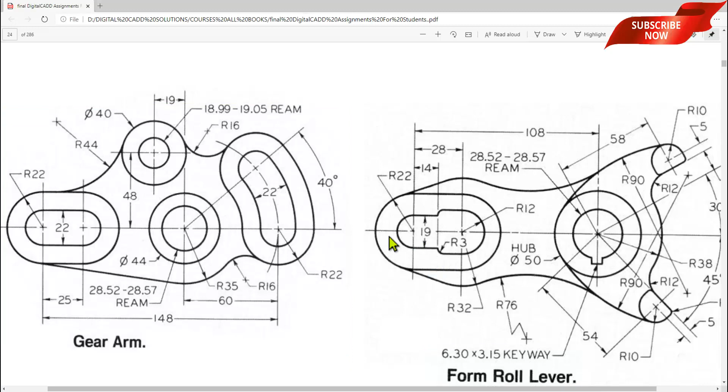In this session, we are going to create two drawings: gear arm and form roll lever. Here you can see we have two drawings for this session. I hope this will help you so much for making some mechanical drawings in AutoCAD 2020.

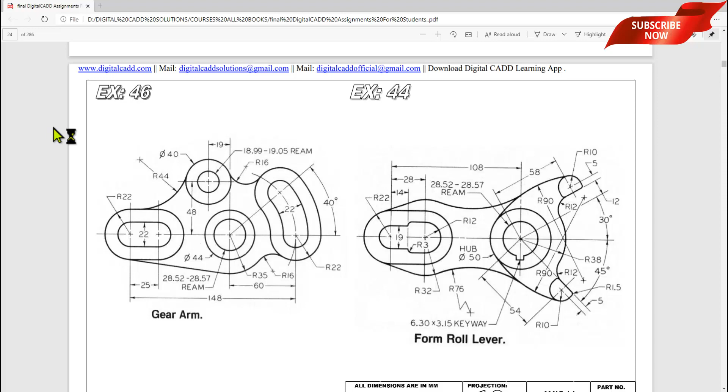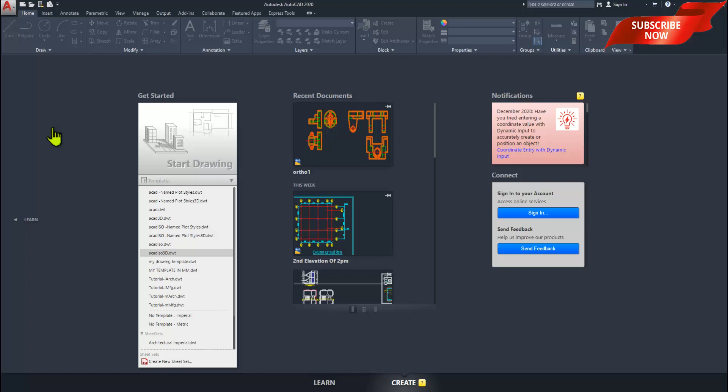Let's begin. We have opened AutoCAD 2020 here. First of all, we need to select a drawing template. I always recommend using this ISO template, ACAD ISO.dwt, so that we don't have to set units again and again.

Our unit is already set to millimeters. You can check by pressing U and enter. Here you can see millimeters is already selected. You can set your precision as well, keep it decimal, and say OK to it.

Here you can see we don't have any file tab open, so let's show it. Just go to View, File Tab, and show the menu bar here. You can see the show menu bar option. Now we have the menu bar also, and let's keep it as it is.

First of all, make grid mode off, we don't need that grid here. And make ortho mode on, so that we can draw a straight line or copy any object in a straight way, either horizontal or vertical. We must make these four buttons on before starting our drawings.

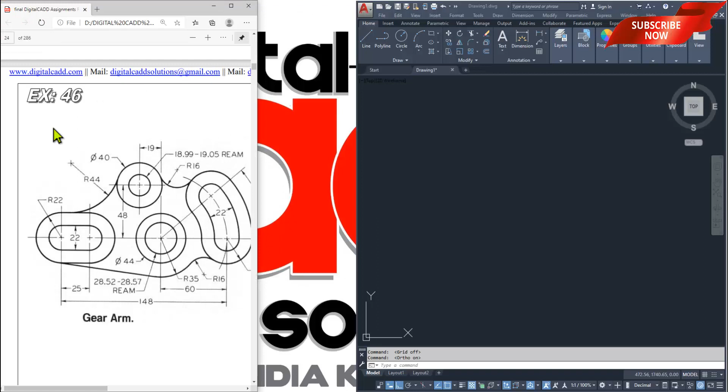Now we are going to split our screen, so that we can see both in one screen: the drawing as well as our CAD software. I hope this lecture will help you a lot. After watching this, you would be able to draw this type of drawing.

Let's begin. First of all, let's create some layers. Here you can see we have the Layer Properties options. Just click here to create a new layer. Here you can see we have a new layer option - one, that is drawings.

Enter. Select the color, let's say yellow, and then OK. The line type is already selected to continuous, and for line thickness, let's keep it 0.30 mm and say OK to it.

Now, center line. Enter. Select the color, that is red. Go to line type - we don't have any center line here, so go to Load, select any one, and press C for center. Here you can see center 2, that is half of center 1, 0.5x. Select center 2, OK, and line weight, that is by default.

Now the third one is dimension, which is very much important. Without dimensions, it's not good to make any mechanical drawing. So just create one layer for that. Select this color, that is cyan, and keep the line type continuous, and line weight default.

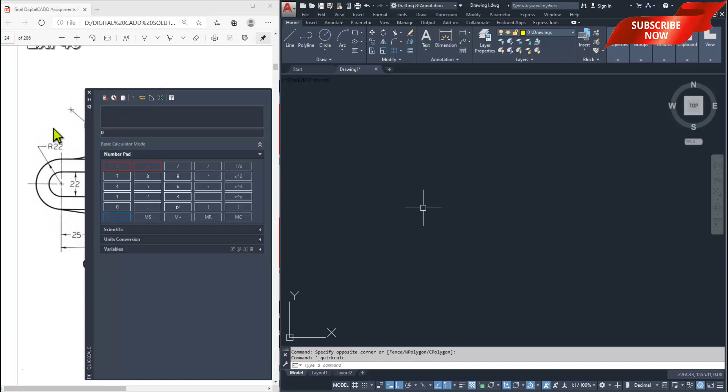Then we will put the value of this circle, that is the ream. Press Ctrl+8 to open the calculator. Add them: 28.52 plus 28.57, equal, and divided by 2 - that is our value, which is 28.545. Select C for circle; C is the shortcut for circle.

Specify the center point. Here you can see we need to have a diameter. Click the diameter option and type the value, that is 28.545. Here you can see we have applied some thickness to this layer, but we can't see it.

So we must make this button on to see the thickness we have applied in the layer. If you want to check the diameter as well as radius, go to Utility, and here you can see radius or diameter - you can check from here, 28.55.

We have entered the value 545, which is quite good. Now we have 44. Again press C for circle, specify the center point - here we can see diameter, and that is 44, the diameter.

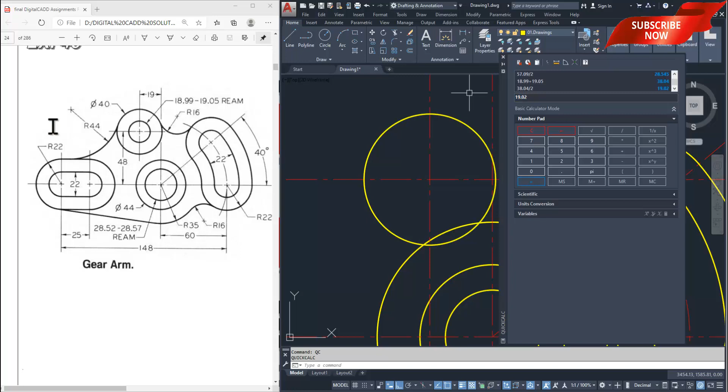One more: 18.99 plus 19.05 divided by 2. We can calculate. Control, otherwise press QC for calculator. Q is the shortcut, QC is the shortcut for calculator. Quick calculator. And here we have the value, which is 18.99 plus 19.05 equal, okay, divided by 2. That is our exact value of diameter, 19.02.

Then, from here select this, start from here, 19.02, okay, that's okay. So this is also done, and now we must create this profile.

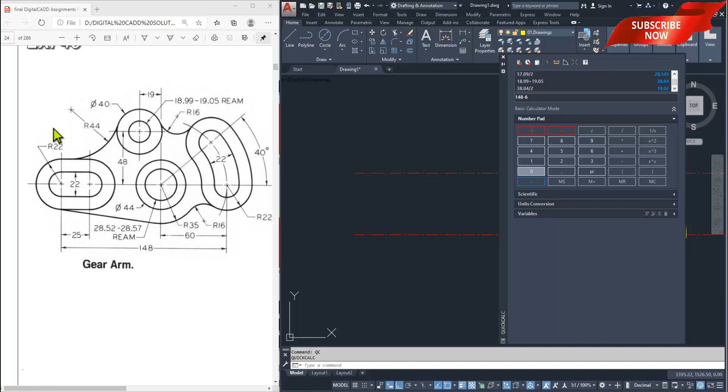So then we have to make an offset of 148 from this center, otherwise minus 60 from here. So you can calculate here 148 minus 60. QC is the calculator, and 148 minus 60, so you can see 88. Now O is the shortcut for offset. 88 is our offset distance from this center, then like this.

Now we have to create this circle. C is the circle shortcut, and radius is given 22. Type here 22. Again diameter is given 22, again D for diameter 22, which is good.

Then select these both circles, go to copy command, specify any base point, click anywhere and type the distance, which is 25. So just type here 25, space.

Now L is the shortcut for line, quadrant to quadrant. You can't see the quadrant because in our object snap option, not all the buttons are on. So we must select object snap setting here, select all options, then okay, so that we can see all the nodes. Here you can see quadrant to quadrant. This is very much helpful.

Remember one thing, before starting any drawing we must ensure that these 4 buttons are on or off. Make sure all 4 buttons must be on. In object snap here you can see all nodes must be on, so that we can make all the drawings easily without any error.

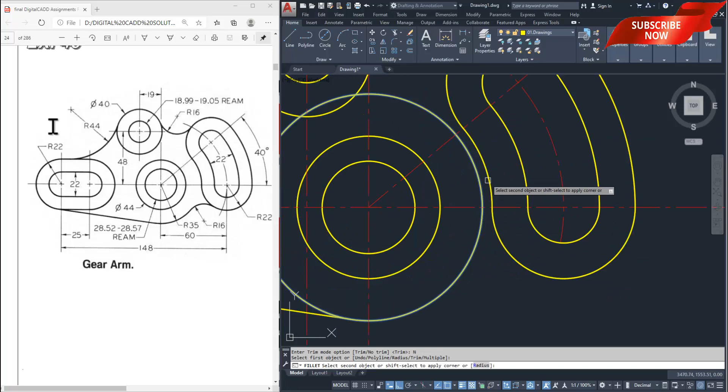Here is the fillet tool, select this tool. Here is the radius, type the value, that is 16. Now go to trim and you have to select no trim option because we don't want to trim. The radius is given 16, select this circle as well as this circle, which is joined actually, that's why we can't apply fillet here.

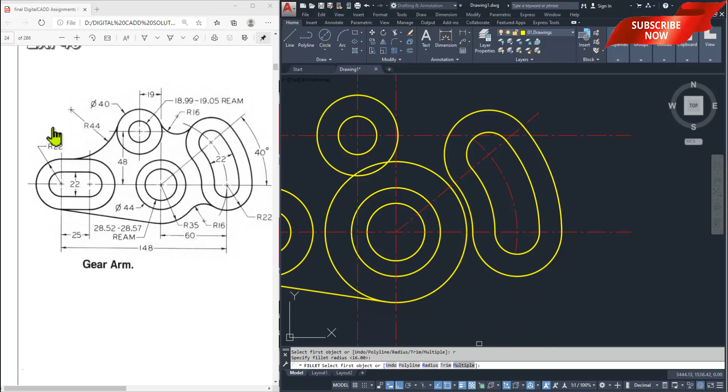If we explode them then we can easily apply the fillet tool here. F is the shortcut for fillet, R is the shortcut for radius, type 16, and select trim option, select no trim, select this circle and this one. Quite easy. Here we can also select this one as well as this one.

Here you can see 44, we must change the radius, select this line and this circle. We must trim all the entities which is not required in this drawing. Just TR double enter, trim.

Select, we must select this arc and press delete from your keyboard, so we can easily create this type of drawing. Here you can see, if you don't want to keep these center lines, erase them all.

If you don't want, suppose select here, go to lengthen and here you can see.

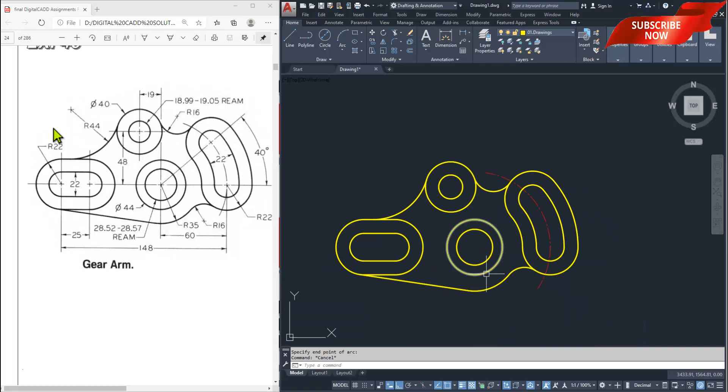Now one another way to apply center line and center mark, we have one more option. Just go to annotate option, here you can see center mark, so you can easily specify. One second, we must just change the layer here, go to annotate, and that's it, and that's it.

Select, you can increase the length as well, and then L is the shortcut for line, specify the center. CEN is the center, and press tab 40 degree. So you can see, everything is done.

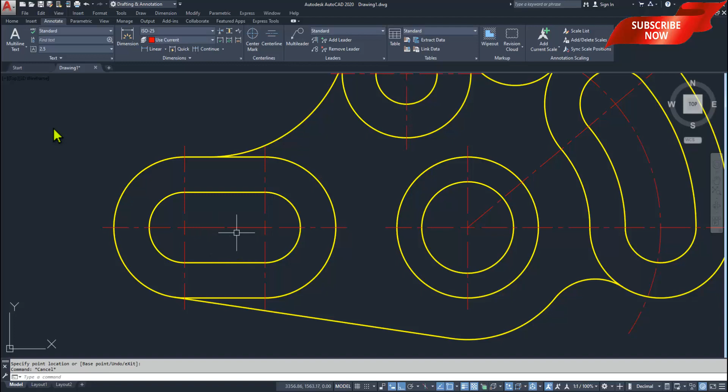And now what should we do here? Just decrease the length here. Okay, now it is looking very nice. So we have done one drawing.

And now let's see the second one. Here you can see later we will apply the dimensions. I hope this drawing is understandable for you all guys.

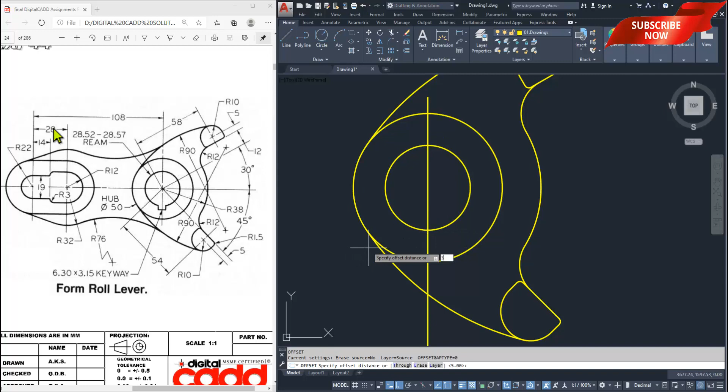And now what should we do here? You can see the exact length of this keyway, that is 3.15 by 6.30. Just draw a vertical line, and now make an offset of 3.15 right side, 3.15 left side. O is the shortcut for offset. Start from here, 3.15 enter, which is already 6.30, yes okay.

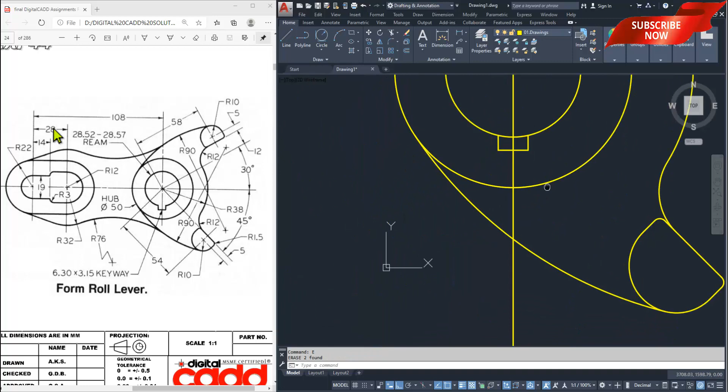Now delete them all. Here you can see TR, enter. So that's okay, fine. Erase is the shortcut, done it, no problem.

And now here you can see the distance between these two center points, which is 1.108, 108. Press C for circle, just drag like this, drag the center point and type the value, that is 108. Here you can see the radius is given 22. Now select, copy, specify the base point here and type the value, that is 28.

28. L is the shortcut for line, quadrant to quadrant, and again quadrant to quadrant. TR double enter, just trim them all.

C is the circle shortcut. Here you can see radius is 12, start from the center, and 12, done. Diameter is 19, again space bar to repeat the circle, D for diameter, 19. Distance is given 14. L is the shortcut for line, 14, enter, and drag this quadrant.

Here you can see the given radius, that is 3, but this is not right actually. If we calculate the dimension, if radius is 12, then diameter would be how much? 24 minus 19, that is 5. 2.5 here, 2.5 here. So we must apply the fillet radius 2.5 here, not 3.

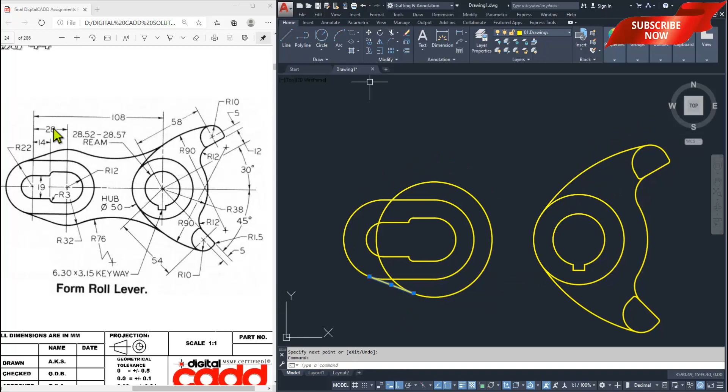Now we can make the circle of radius 32, C for circle, center, 32, enter, and again draw a line, tangent, tangent. Select this line, go to mirror, specify first point of mirror line, second point of mirror line, set to no, TR double enter, E for erase.

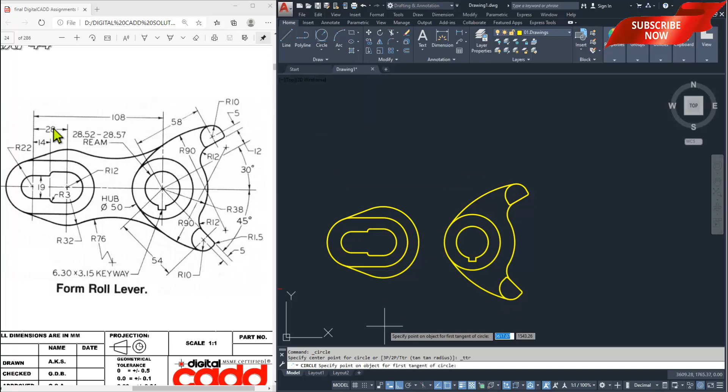Okay, now 76. Here you can see tangent radius, select this one, radius is 76. Again same thing, tangent 76, TR double enter, trim.

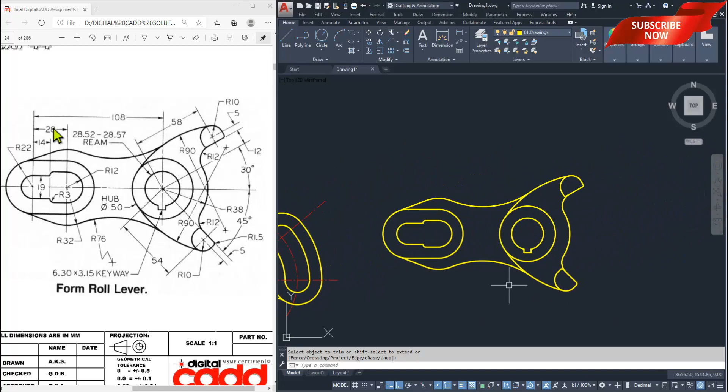Okay, now here you can see how beautiful these drawings are looking. I hope this must be very easy for you. I'm not going to show you how to apply dimensions because we already know how to apply dimensions, so forget it, we have to save our time.

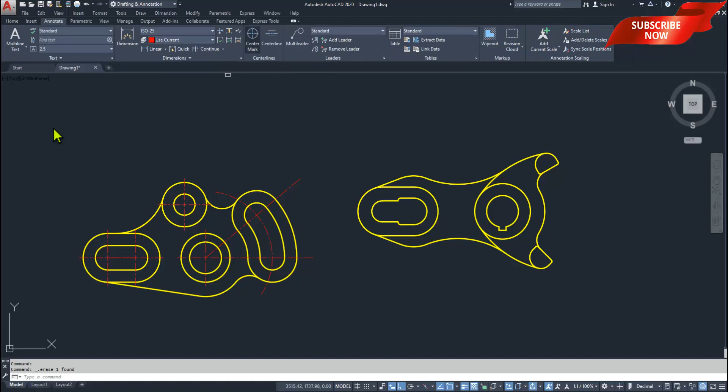So here you can see we have created these two drawings, and let's apply some annotations. Make the center line current and go to annotate, here you can see circle and circle, just connect.